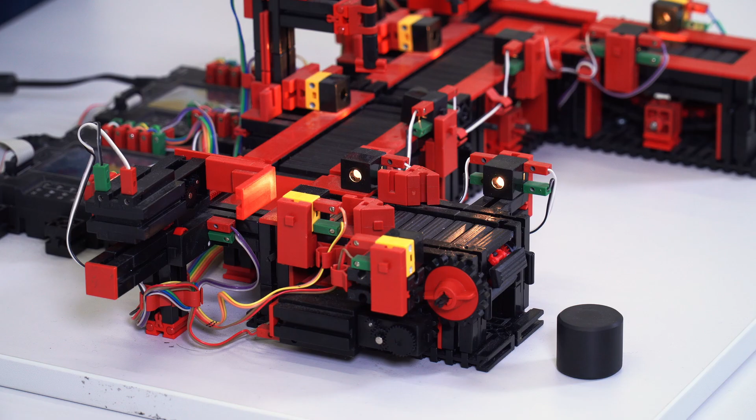Today we will consider another model from the Fischertechnik line. This model consists of 4 conveyor belts with a milling and drilling station. There are also 2 controllers, master and slave. So let's take a closer look at this model. All processes start from this place.

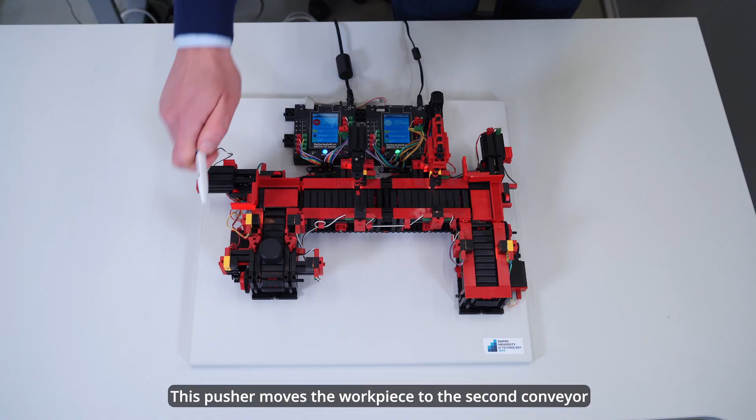Here we see the first conveyor belt and 2 phototransistors. Next is a pusher with an electric motor. This pusher moves the workpiece to the second conveyor. Another phototransistor is also located here. When the workpiece reaches the phototransistor, the conveyor stops and the milling station is turned on.

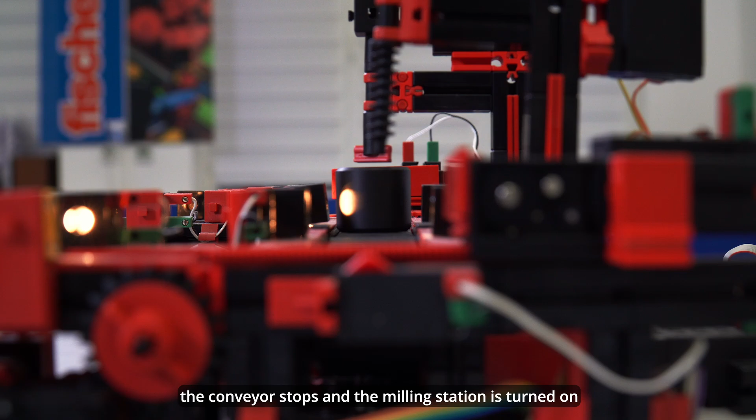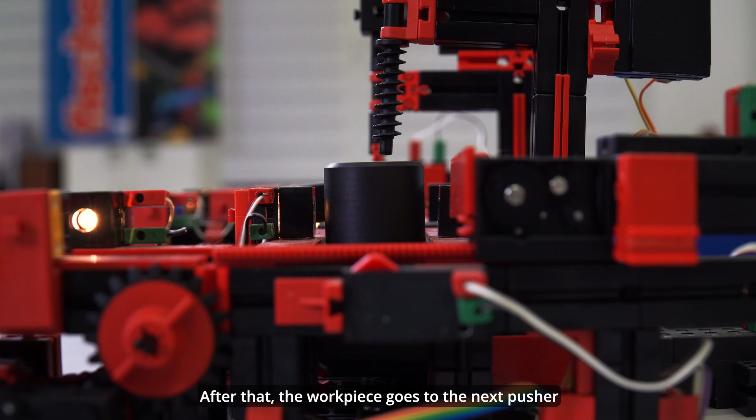After that, the workpiece goes to the third conveyor with another phototransistor. There is already a stage with a drilling station. After that, the workpiece goes to the next pusher, which moves it to the last conveyor with the phototransistor. At this stage, all processes are completed.

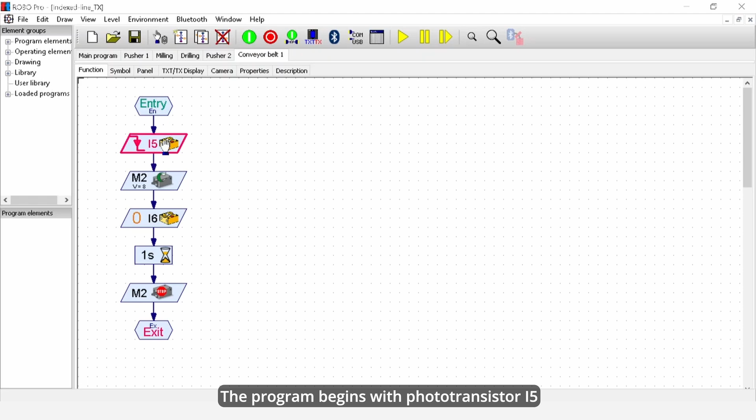Practical part. As we can see, the main program consists of 5 parts. Let's consider each separately. The first part is a conveyor belt. The program begins with phototransistor I5. The lamps shining on the phototransistors are powered in parallel with the phototransistors. Therefore, we do not use them as separate elements in the program.

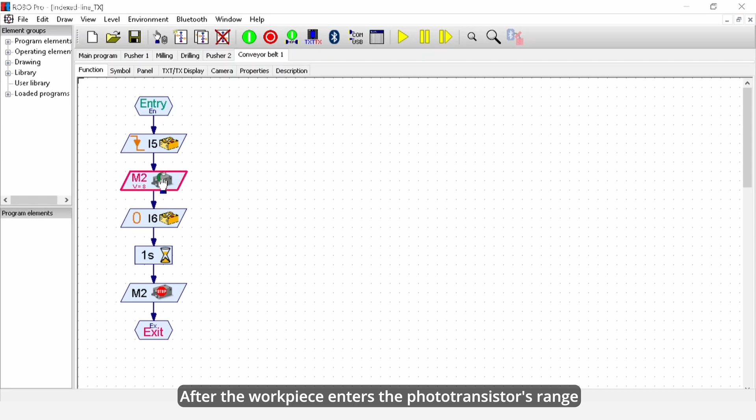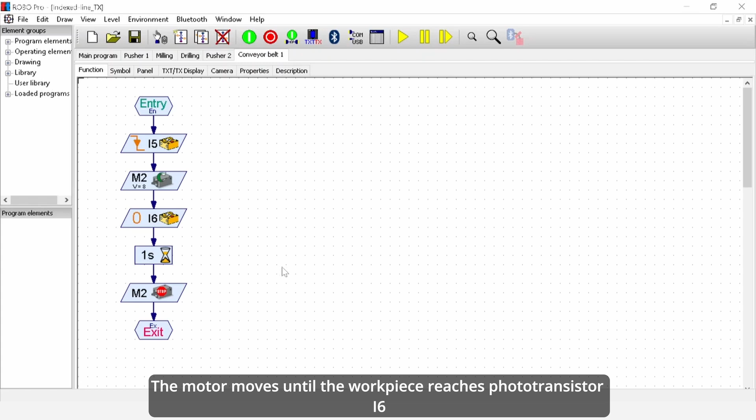After the workpiece enters the phototransistor's range, the M2 motor starts moving. The motor moves until the workpiece reaches phototransistor I6. After a second pause, the motor stops. At this point, the subroutine ends.

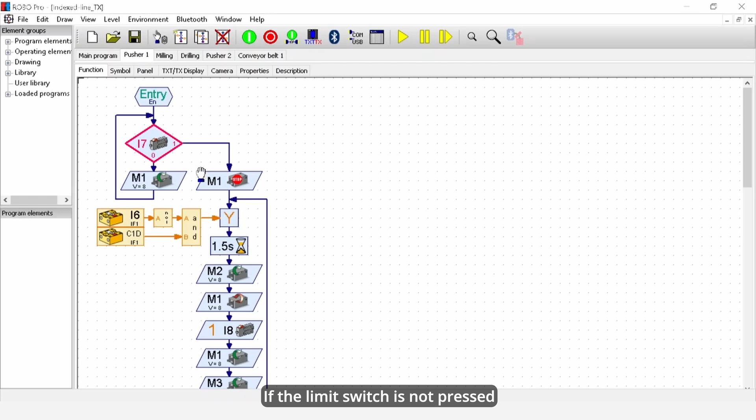The next subroutine is pusher 1. At the beginning of this subroutine, the pusher itself must be in the initial position. For this, limit switch I7 is used. If the limit switch is not pressed, the motor M1 moves to the right until the switch is pressed. After that, the motor will stop and another process will start.

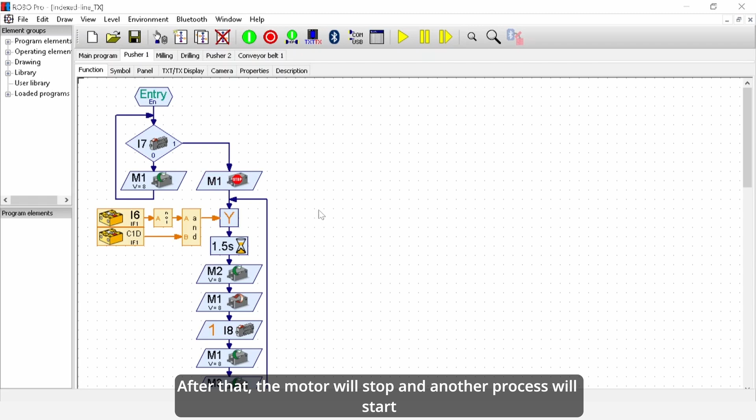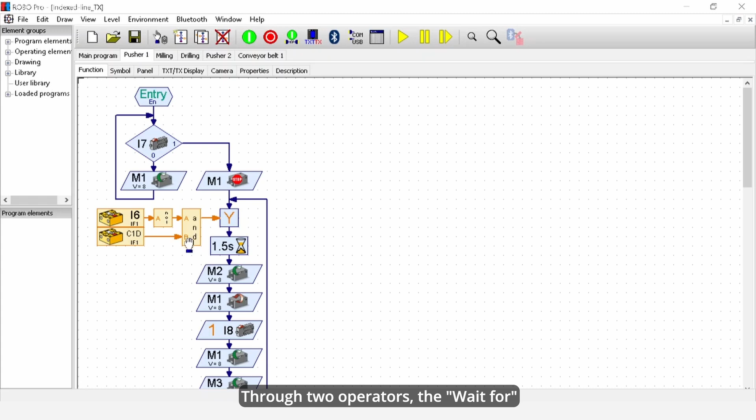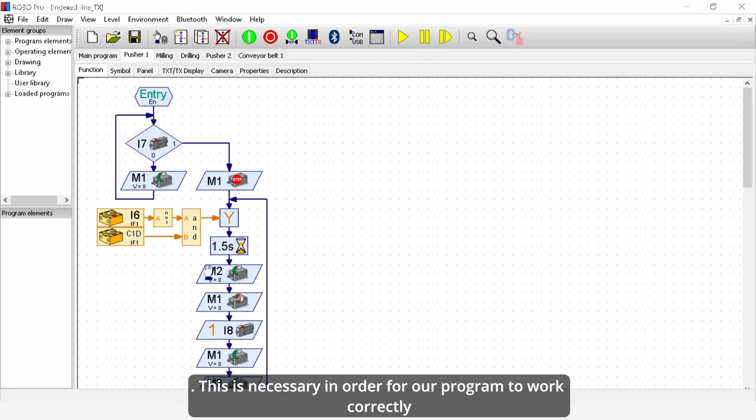Next we can see a very interesting picture. We have phototransistor I6 and phototransistor C1D. Through 2 operators, the wait for element receives information from these phototransistors. This is necessary in order for our program to work correctly when using several blanks at the same time.

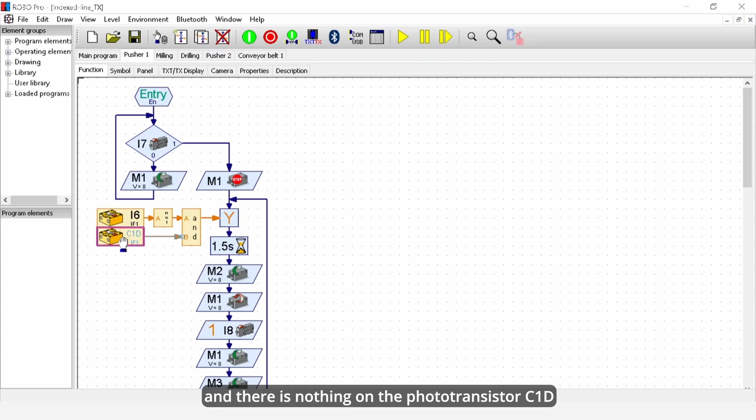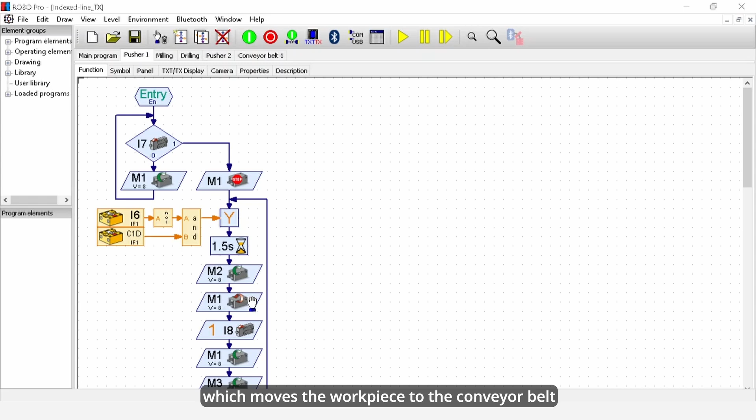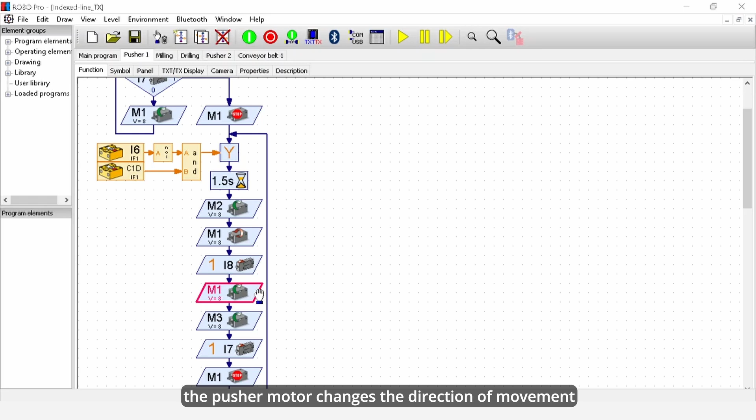When the workpiece reaches the phototransistor I6 and there is nothing on the phototransistor C1D, the motor M2 starts again and the pusher M1 is activated, which moves the workpiece to the conveyor belt. After pressing the limit switch I8, the pusher motor changes the direction of movement. At the same time, the motor of the next conveyor starts moving.

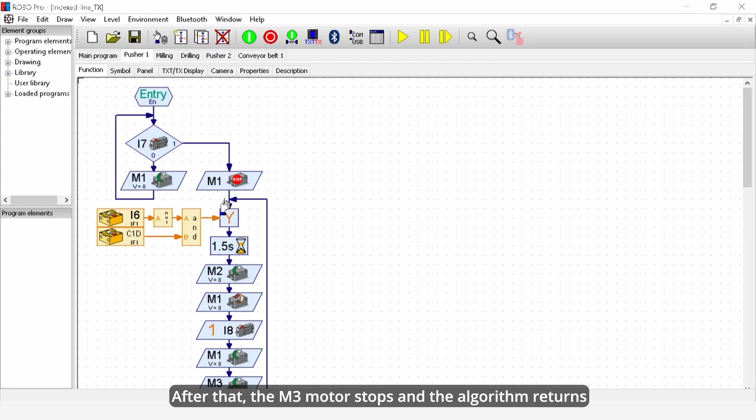When the pusher presses the limit switch I7, the motor M1 stops. Motor M3 still continues to move until the workpiece reaches phototransistor C1D. After that, the M3 motor stops and the algorithm returns to the beginning of this subroutine.

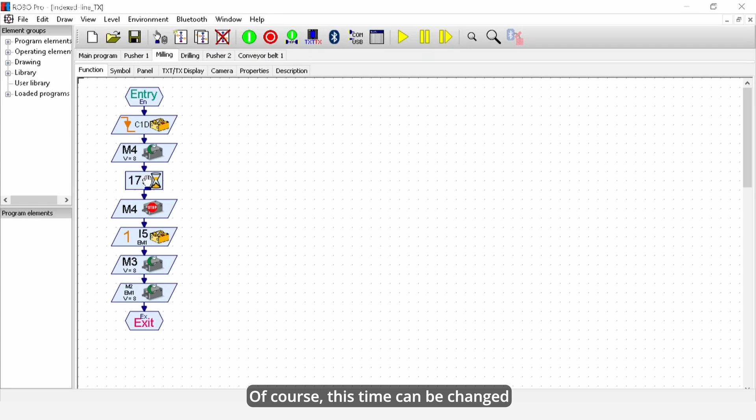The next subroutine is milling. As soon as the workpiece appears in the area of operation of the phototransistor C1D, the motor of the milling machine starts moving. A pause of 17 seconds is maintained. Of course, this time can be changed. After that, the M4 motor of the milling machine stops.

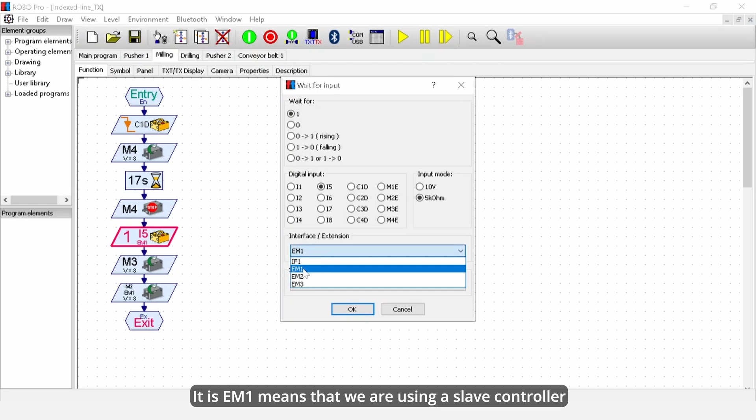At this stage, the auxiliary controller or slave controller is already connected to the work. We see the element wait for with the address I5 and the node EM1. EM1 means that we are using a slave controller. In the additional menu, we can choose which controller to use. The default is always IF1.

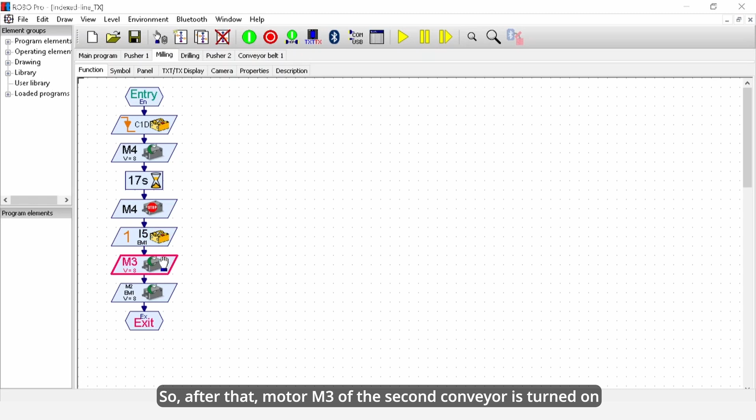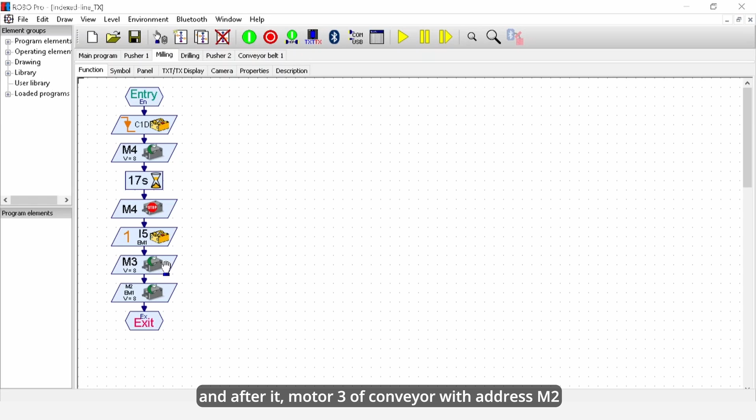Only after stopping the motor M4, the program switches to the phototransistor I5 with the value of 1, which means that the workpiece has not yet moved to it. So after that, motor M3 of the second conveyor is turned on, and after it motor M2 of the conveyor, but already of the slave controller, is turned on. This completes the subroutine.

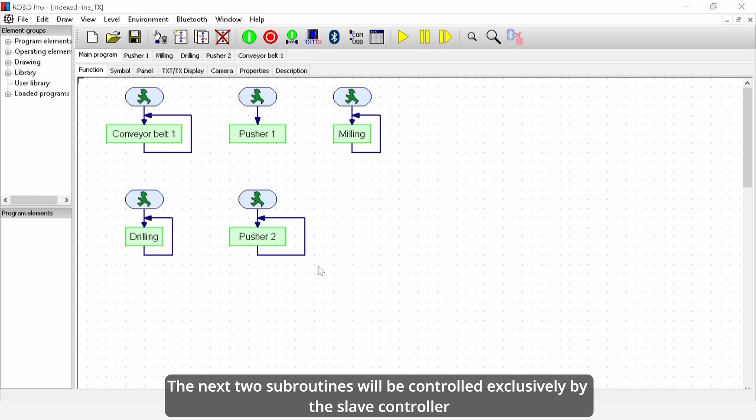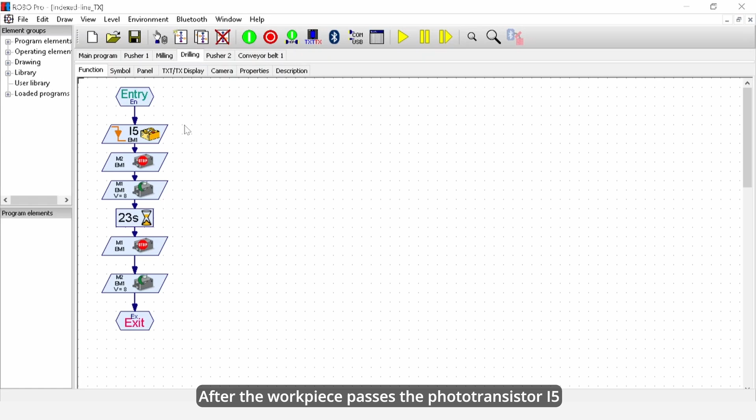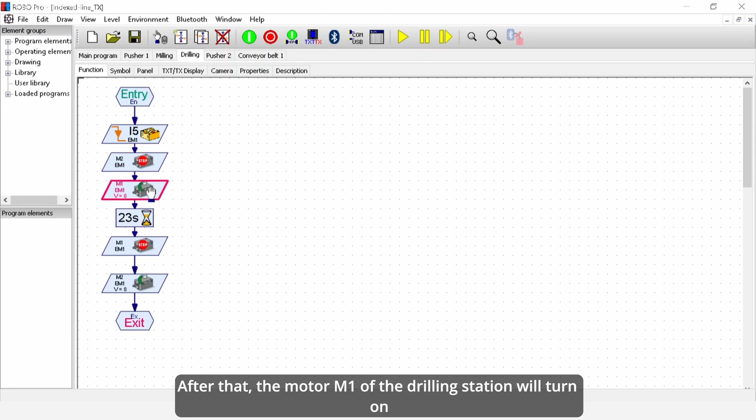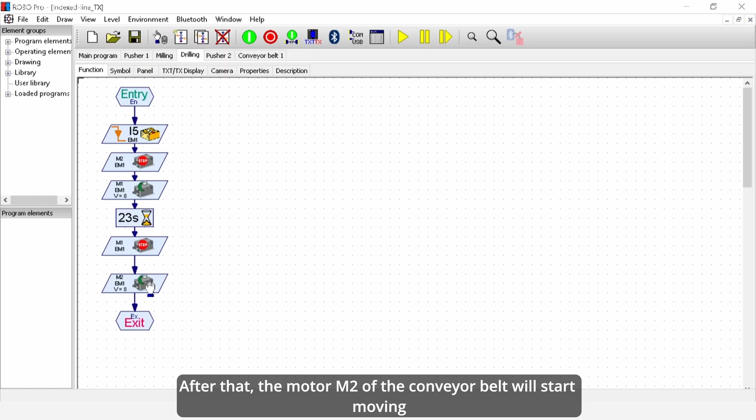The next two subroutines will be controlled exclusively by the slave controller. The penultimate subroutine is the drilling station. After the workpiece passes the phototransistor I5, the motor M2 will stop. After that, the motor M1 of the drilling station will turn on. The motor will run for 23 seconds and then stop. After that, the motor M2 of the conveyor belt will start moving. This completes this routine.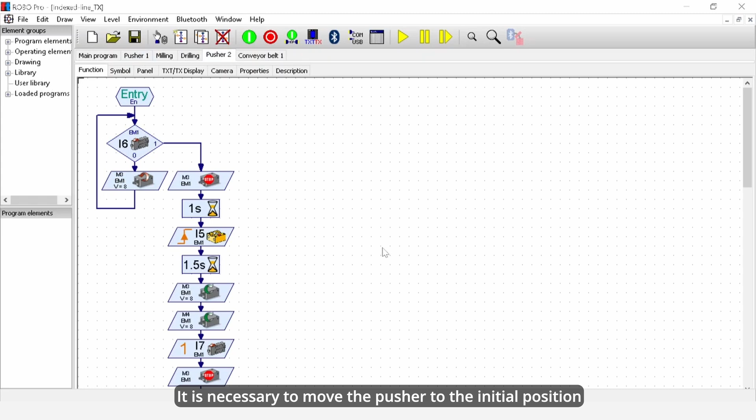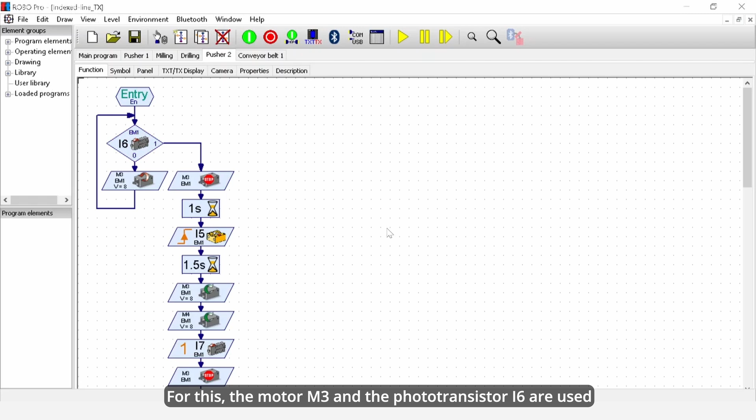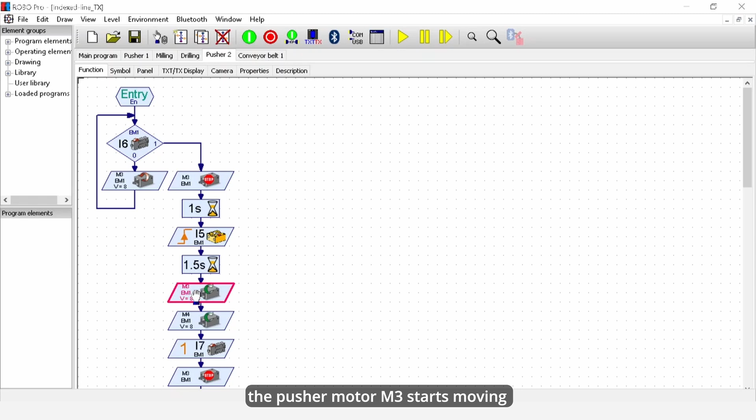The last subroutine is pusher 2. It is necessary to move the pusher to the initial position. For this, the motor M3 and the phototransistor I6 are used. As soon as the state of the phototransistor I5 changes to 1, after a pause, the pusher motor M3 starts moving and moves the workpiece to the last conveyor belt. At the same time, the M4 motor of the conveyor belt starts moving.

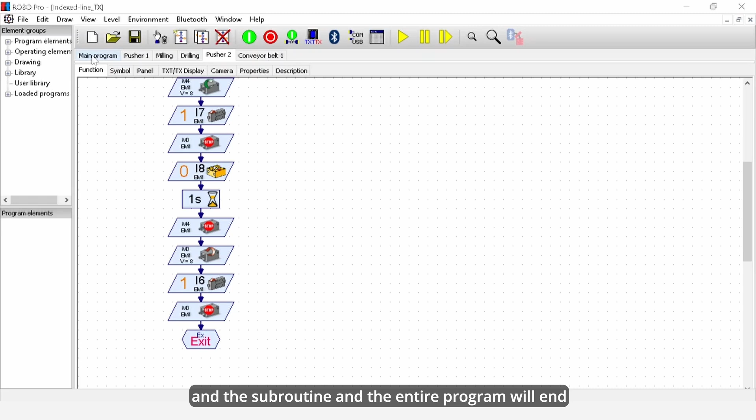As soon as the pusher presses the limit switch I7, its motor M3 stops. The conveyor motor M4 continues to move until the workpiece reaches the phototransistor I8. After the pause, the conveyor motor M4 stops. The pusher motor M3 changes the direction of movement until the pusher presses the limit switch I6. Then the M3 motor will stop and the subroutine and the entire program will end. So now you can look at the result of this program.